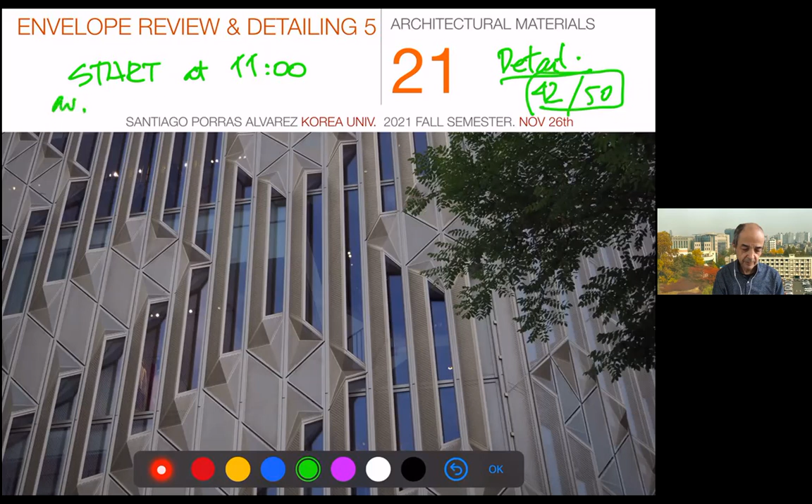So probably both the practice and the difficulty helped. It was good because in the exam, the average was about 77 out of 100, which is the aim. So I guess the exam was rather easy, which I'm glad. And actually only 5 people this time are under 50, right?

Of those, one, he knows who he is, but he has just 18 points. It's the one who left the exam in 5 minutes. But doesn't matter. So I would consider just 4 people, and they're not excessively low.

So let's see. In the cover, you have the facade. I think it's the Burberry shop in Cheongdam, Seoul, which is quite interesting, a double layered curtain wall, which we'll not see. If I find the detail, it could be practiced sometime later.

I will start with assignments because we have one exam left, one quiz. The quiz adds, of course, but the quizzes are our kind of practice, and they don't have so much influence. So right now, what you can do to improve apart from attendance is assignments. And still I'm missing a lot of assignments. I will try to catch up over the weekend, so I will have clear who is missing. So I will put a warning, but really: assignments, final exam.

So the second part. There's not much we can do beyond what we did already. Then we'll see the detail of the exam, as I commented, and I will have whatever I think is interesting, some more notes on envelopes, so we can start on Tuesday with the exciting construction management lectures, which is just 2 lectures and 1 quiz and 1 assignment.

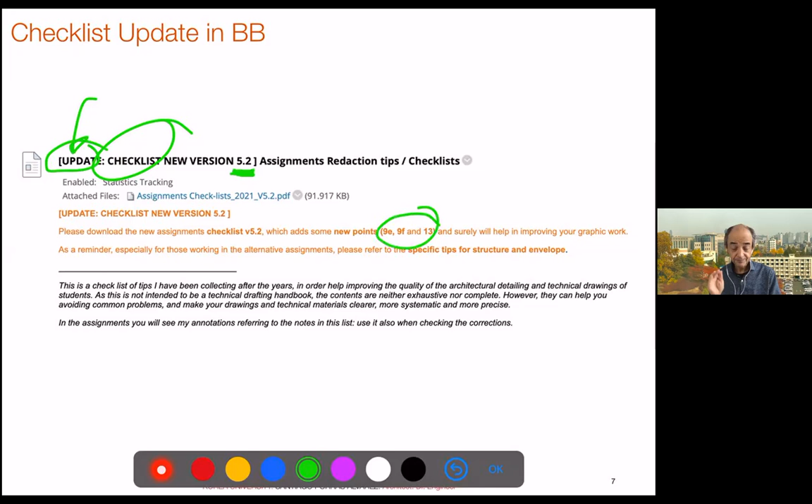So in Blackboard, remember we have a checklist. I updated it with 3 notes, so now the version is 5.2. Please download it and have it as a reference. I added some points because I started to put the notes on many of your assignments. Please go there and use it. The new notes are in point 9, which is one of the points I comment on more, in terms of marking and describing all elements in the detail.

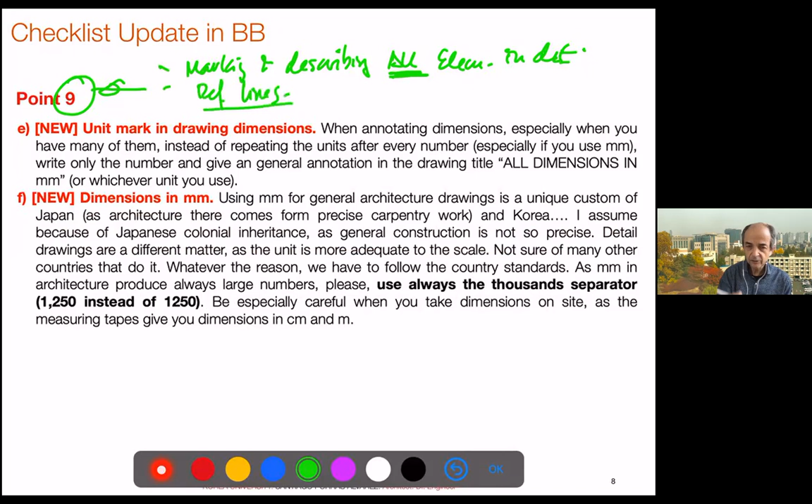It is important because the books focus on one specific part, but when you make a real detail, you have to tell what every little piece you draw is. For the people who are going to build it, of course, but also for you to demonstrate you really understand what you're drawing. It is also about the reference lines, how to put them. The biggest problem is often they get confused with the drawing, right?

So if we have the typical detail of a facade with a window, the layers, and we put reference lines which are just in coincidence with the lines of the drawing, it's very hard to know what they are saying, right? We don't know if this is the floor or just a reference and so on. And that happens very often.

So one thing I added is the unit mark in drawing dimensions. I noticed many of you had many small dimensions, like 200 millimeters and 1,200 millimeters, and millimeters appears all the time. That makes for very long writing, right, with plenty of units. So what we do is to put just a note: all dimensions in millimeters. So usually in one drawing, we use only 1 unit.

The full project should be in 1 unit, of course, but in some places it's more appropriate to use meters than millimeters. So in that case, you just put the mark and you don't need to repeat millimeters all the time. So you avoid confusion and it is much easier to read, to understand. The other thing is the dimensions in millimeters.

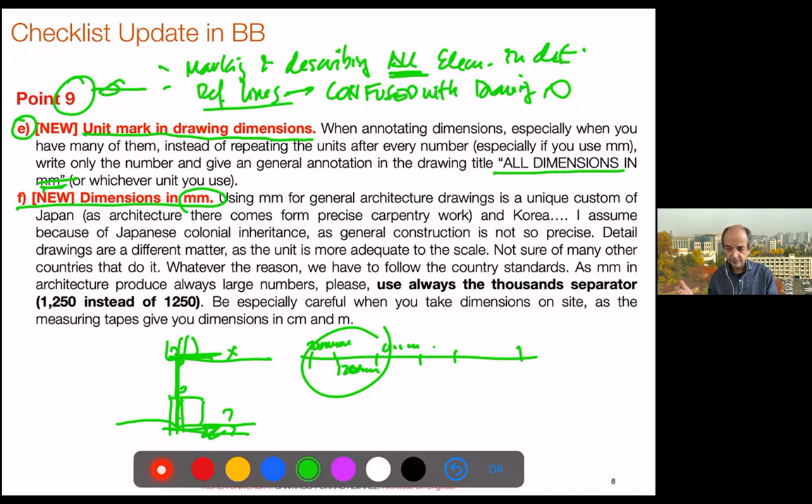This is a fight we have, especially from the States and Europe, with especially Korea and Japan. I don't know why architecture is dimensioned in millimeters, because the units we use are in relation to the size of the elements we dimension. And architecture obviously is best in meters or at most in centimeters. Millimeters we use only for details. So I don't know why that custom in Korea. My guess is that it's a Japanese colonial inheritance.

In Japan, architecture is almost synonymous with carpentry, and carpentry is precision work. Japanese are very precise. In Korea, without saying better or worse, the precision is not millimeters at all.

In Spain, I was told that putting 1 centimeter less or more in dimensions was silly in architecture, because really there's no way we can control that. We already commented, for example, in the structures, we mentioned the concrete slabs, which are just leveled by hand, and those slab borders where the concrete pushes the form, then retracts with the curing and so on. There are many errors, but whatever.

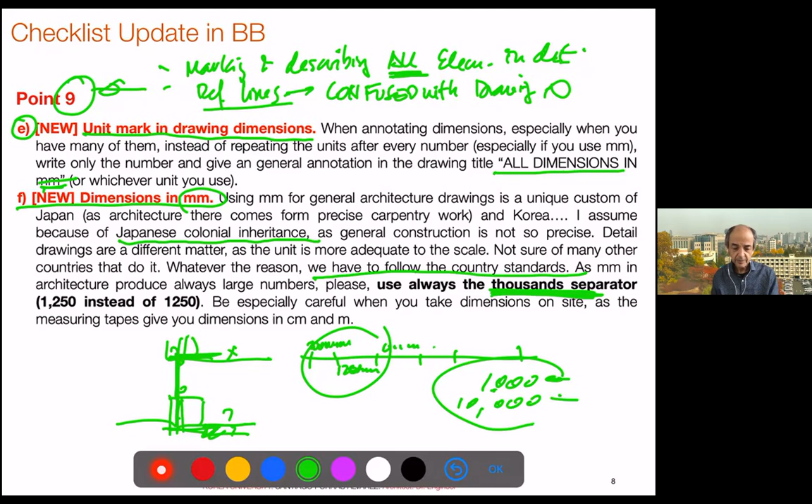It is easier to read, but I would be consistent and put the thousands marks everywhere, so it is easier to read. This is a very small note. One more note, which is new: this is not very important, but it's about color in construction drawings.

So it is perfectly okay to use colors in your details, that helps, especially in assignments, competitions, and publications, where we have more freedom. So clarity is important. But in real life projects, on construction sites, still in 2021, almost all work is done with large size sheets, where color printing is not as easy to control and as easy to make as line drawing.

And of course, on a construction site, they have thousands of copies, so the price and cost also have some influence. But really, on the construction site, the plan should be clear, and clarity is achieved by reducing the lines. So we use only lines. Sometimes some filling, but workers, collaborators, and managers are used to seeing line drawings.

Most especially on the construction site, we have wind, we have rain, we have sunshine. It is very hard to build with a tablet. We have freezing temperatures, sunshine, wind, things fall down, break, and one paper sheet is very easy to preserve.

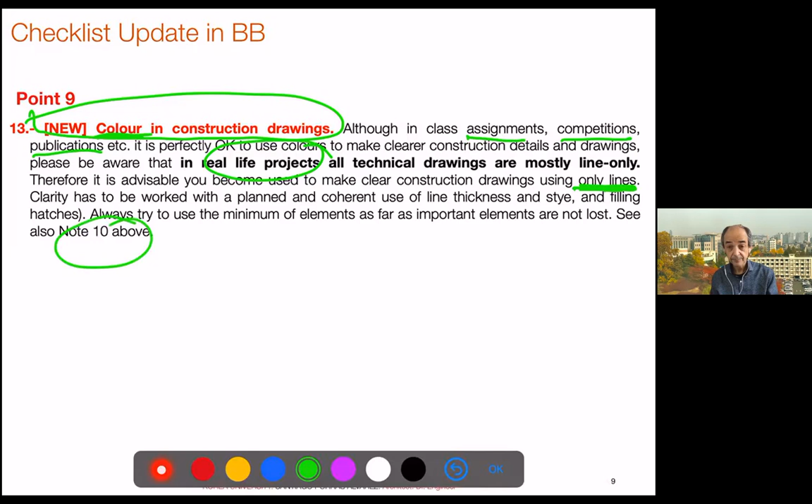So it is a good exercise, you get used to the discipline to draw with lines. And I say this because for some reason, the SPC for verbal and graphic expression is included also in our course. This is why we insist so much on assignments and drawing quality. So please be careful, and see also note 10, which is also in the checklists.

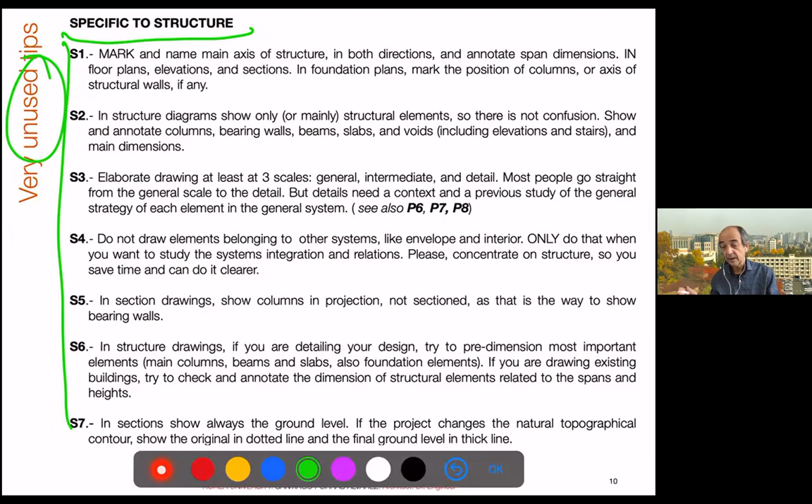There are very unused tips. Of course, not everybody is doing structure, but for those doing the alternative assignment, I wonder if they follow these, just 7 tips, which really help make the drawings clearer. And for everybody, the envelope, which is what we've been doing since assignment 7 — again, there are very few tips, but things that help really make the drawings clearer.

I brought some examples. This is something you remember, this is the plinth detail. I took many examples from assignment 7, I think. This is an envelope detail. Rather than just putting a set of pieces, we have to make very clear what the envelope is.

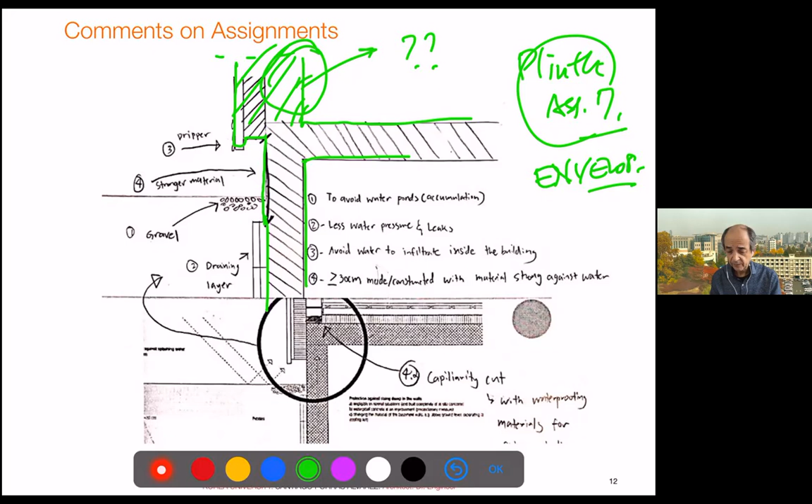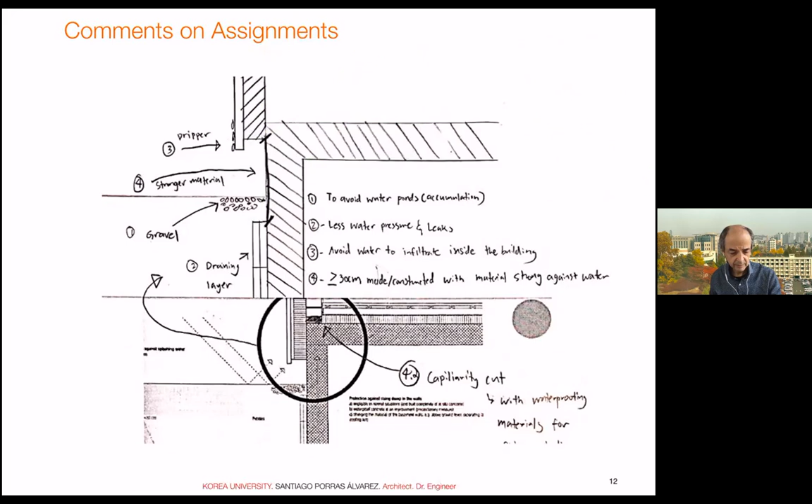Let me clean this. So it will seem that the envelope is just parallel to the structure, and it will be fixed in some strange way, which is possible, but this is confusing. And then the hatches also confuse — this part in the book is an isolation, so using the same hatch for an element you understand as structural is confusing.

And of course, there's no excuse to just put a copy of the drawing. The assignment was not about copying and showing the detail. We all know we have the book, we have the handout. It's for you to exercise in this kind of showing and understanding things.

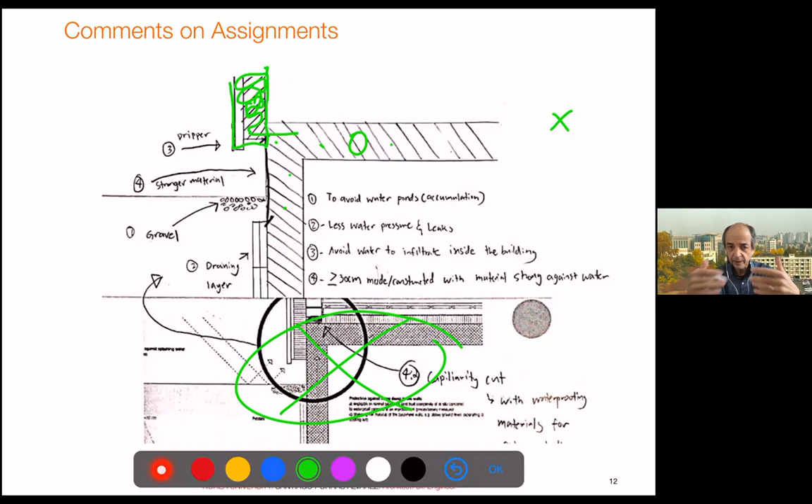There were some people who actually did well. At all the points, of course, I wish the writing were a bit clearer and the drawing nicer, but still we can see all the things. What I don't understand, and this is the extreme case, is why fragment it all.

And I show this and comment because that fragmentary vision of things, only seeing the details and not the big picture, is a problem I see in your generation. I think it's a cultural or generational problem, I don't know. But we are used to small bits of information, when we need the big picture, to know the generality and then go to the details.

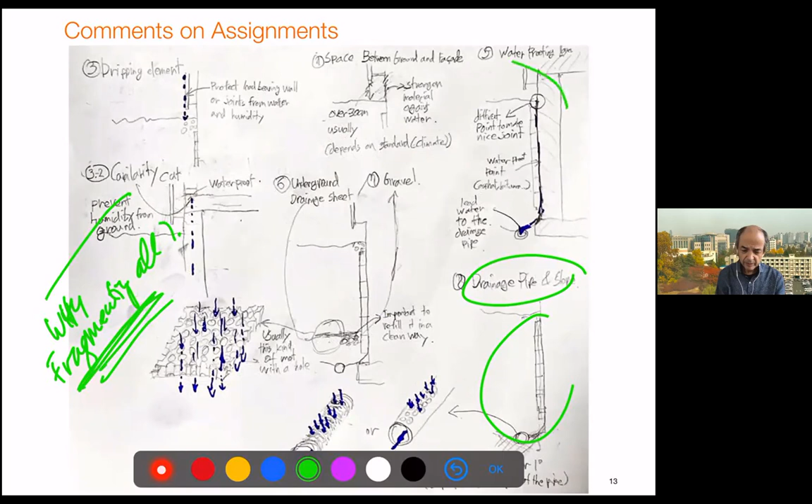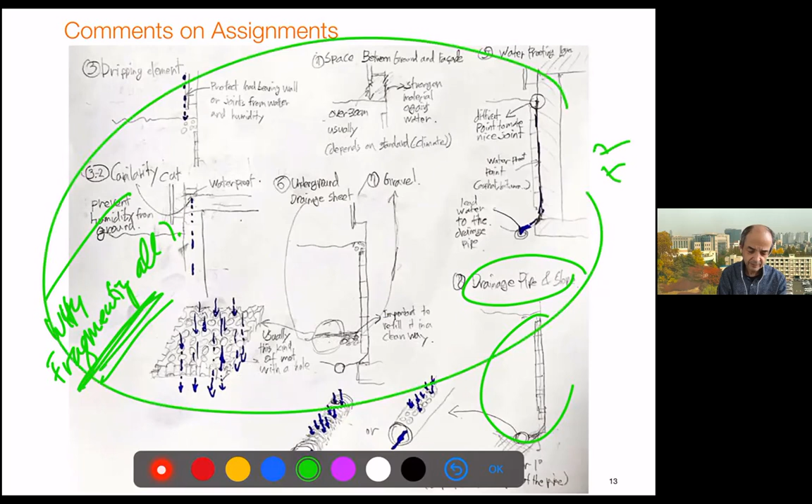What is the difficulty to put all that data together into a large, well-constructed detail? This is very common. Again, this is the most extreme case, but yeah, the big picture, and in this case it's almost literal, right? The integration into one detail is something I miss in this case. And this was quite correct. Almost all the comments include every little difficult point we commented on in class.

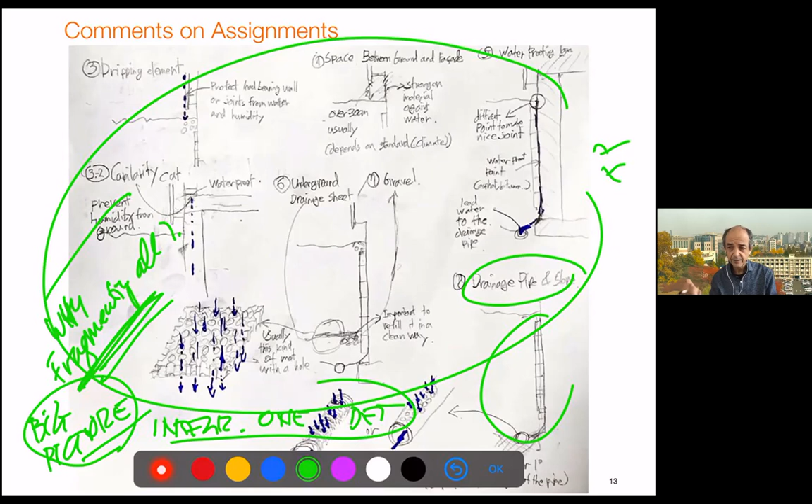But well, I would insist, not only for detailing, when you study, you can see that from the lectures, when you read books, not just small bits of information you get from Google and so on, you have to really create the big picture of everything in your mind. That creates knowledge beyond just bits of spare information.

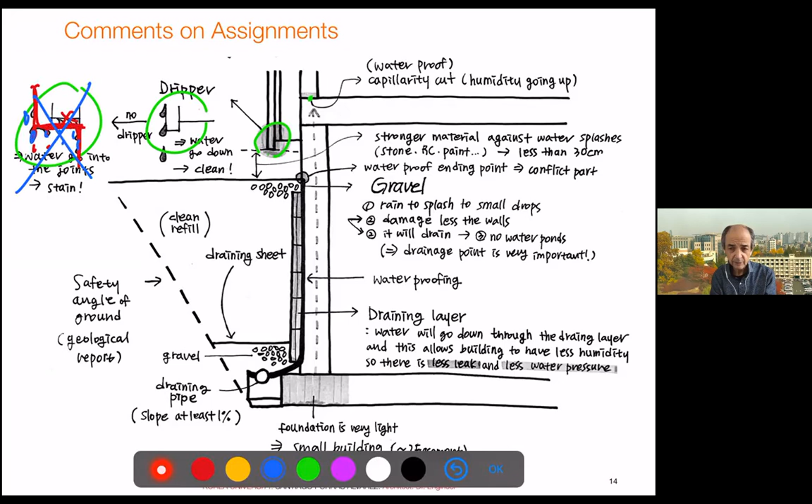Some people did a really careful drafting and a lot of detail, and that's perfectly okay also. But here we have every element clearly pointed out and clearly annotated, right? There's no doubt, and there's clarity.

However, the same students have, again, the same problem. Why was such detail not finished? And this happens very often.

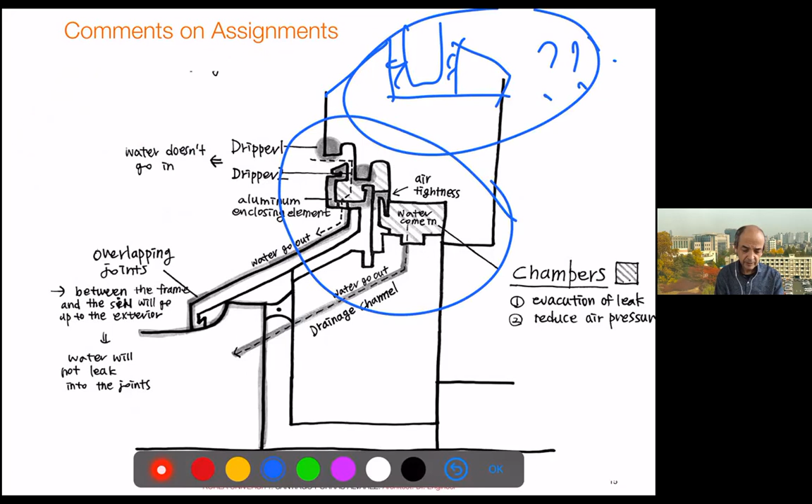Of course, this is a difficult part, but already we are cutting a lot of the detail. So this is very nice, very clear. And even here we say, well, we don't know where this goes out, probably goes under the sill, right? This is something we commented on in class.

This is something we don't always see when we have so many precautions. But yet it is very clear. Now we can see almost everything we need without a lot of complication. And all notes are short and they explain the thing. The only missing part was this, and I don't understand why. Yeah, this is again that mindset of getting too much focus on the small details, on the fragments, and losing a bit of the context.

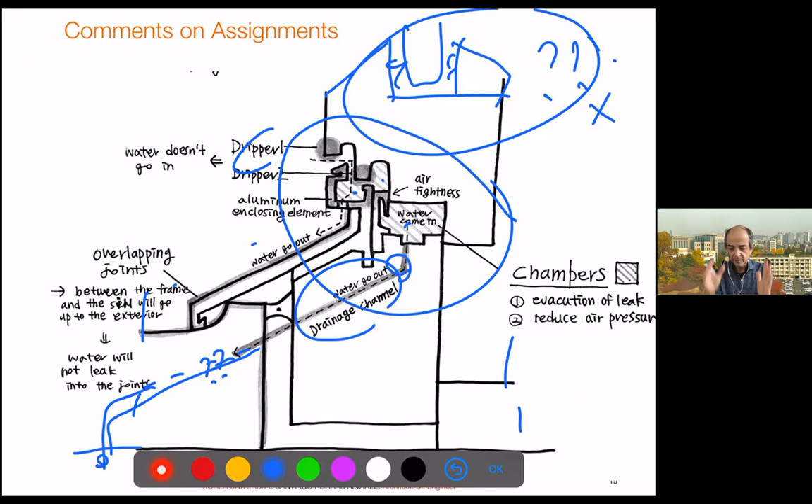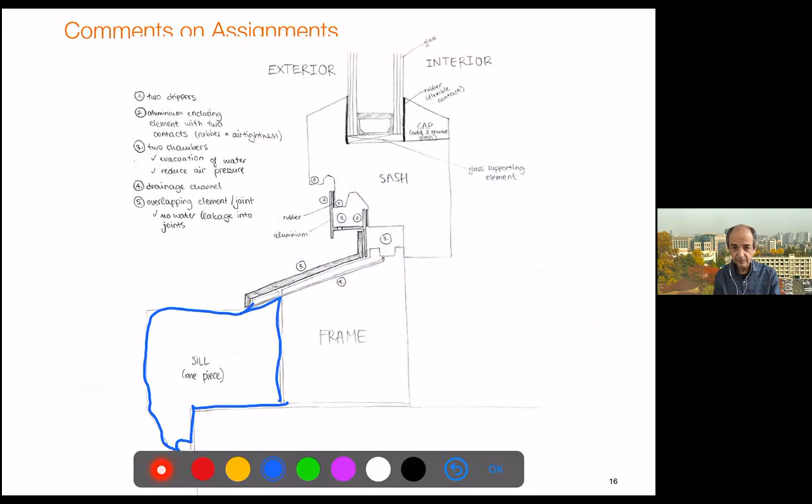This is a well-done example. Actually, one of the few who tried to complete the sill, right? Of course, this should have had a small dripper. Actually, not a very nice sill, but okay, this has the full detail with enough simplification.

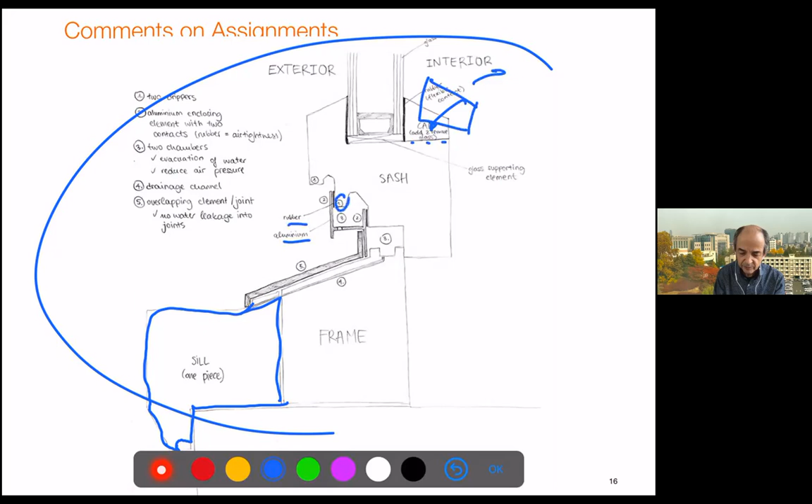Very few people, for example, identified the cap, which is one element we can just move out to replace the glass, make it easy. And again, this is clear, maybe writing a little bit too tiny. And again, I would try to avoid, this is again note 9, avoid annotating inside the detail.

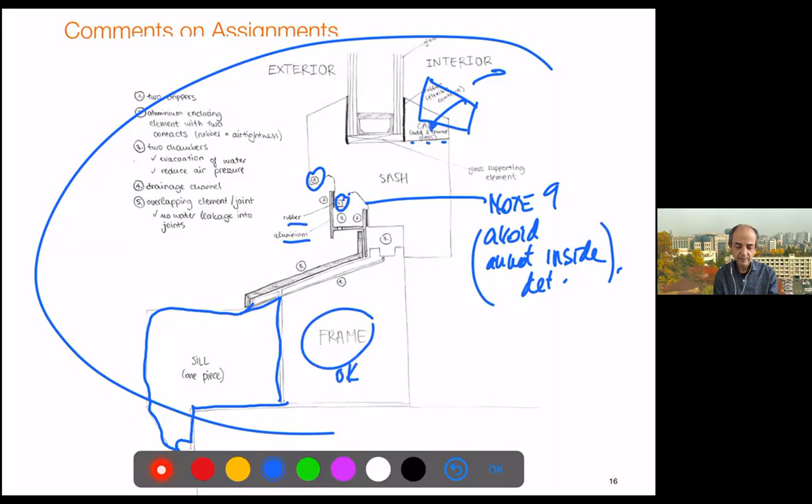In general, especially in small parts, here it's okay, right? Because we have plenty of space. But in general, we try to avoid that. Very few people noted the frame. And one thing, this is a different opinion from the book.

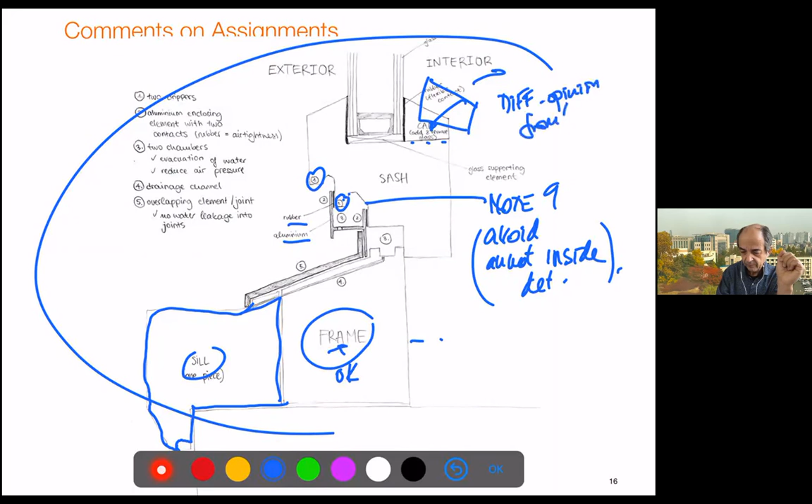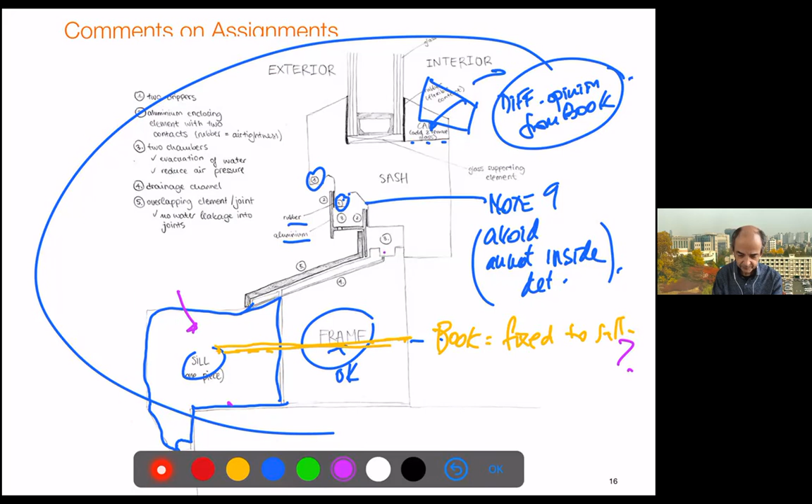If you see the book detail, in the book they put the frame fixture with a big screw to the sill. This is the book, right? It is fixed to the sill. But I wonder why they do it. This is a kind of additional element, it's not very strong. In general, all frames are fixed to the fabric. So the element would be better fixed to a spandrel, right?

This is something that even in a good book, and the Deplazes book is a very good book, written by people who really build. They have the experience of building and know what I'm speaking about. In terms of architecture, you always have to be careful with those who are pure academic and never built anything, because the orientation and vision of things is totally different. But in the case of the Deplazes book, you can be sure those guys are good architects and know what they say. I just don't know why they do this.

Still, we keep always improving things and changing, and I think this is one thing I would never do. So always try to be critical, even with the good books. Not to mention what we see in blogs on the internet - there's so much trash and confusion, and even more in published papers. Be very careful with papers. I think books in general are more reliable because construction is not an academic problem, it's a technical problem. But that's a different thing.

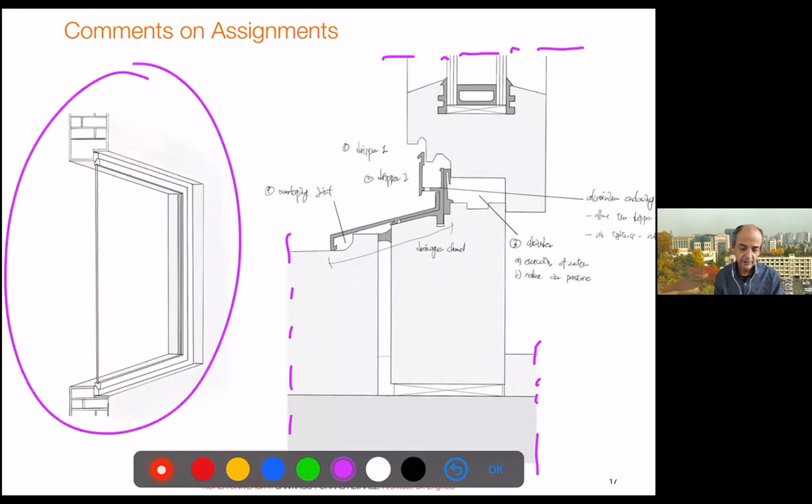This is again one detail which is very nicely done. I would miss - I know the book doesn't have it - but you have to make clear you are not showing the totality. In this case, it's clear. This was probably drafted on the iPad or with some drawing program, but many of you put the reference, which is okay, though I think it's kind of a waste of time.

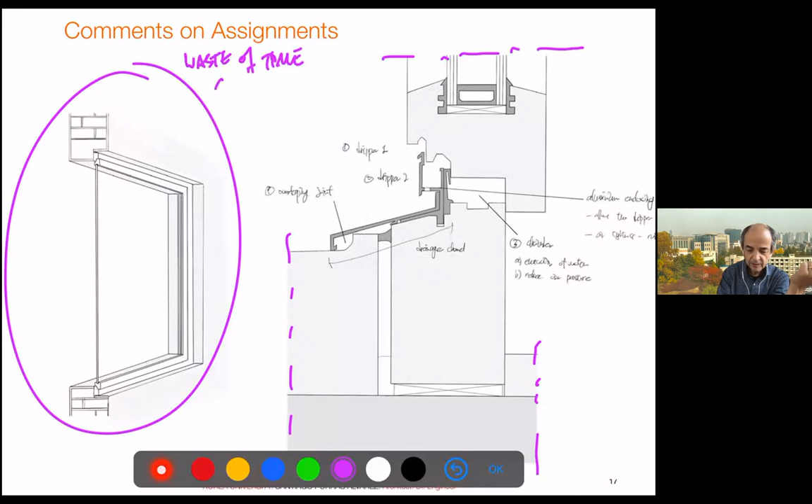Just to repeat it, but it is good practice. So you do it if you want, but it's not necessary. What's interesting is that many of you put a mark like this and showed the detail, and that's not true - what you're showing is really a small part, not even the full interior part. And those elements are cut, they do not go to the end. Be very careful with this, because except for the detail we saw before, very few people were clear about that point.

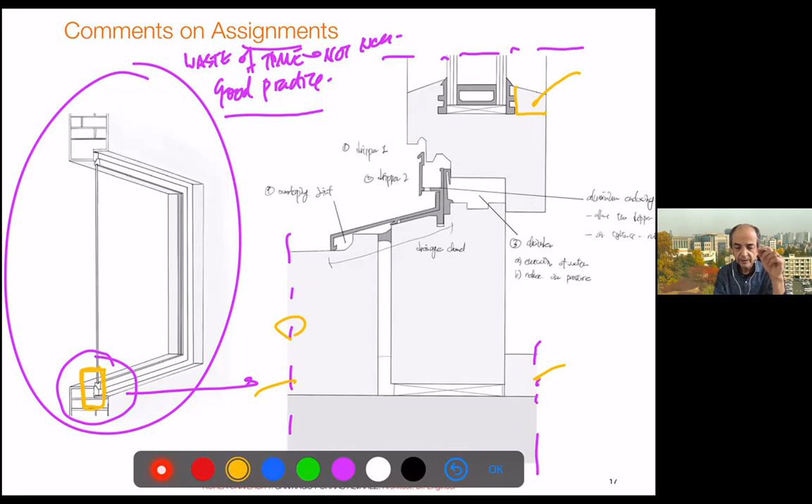You see that the cap is mixed - sorry, missing here. One thing many of you do, and I think the book details it like that, but in reality very seldom will you have the sash in perspective with this cut - you won't so often have this kind of shape that lets you put the cap into those kinds of slits. In reality, the element will be straight, because the standard elements have many points, but they will be fixed just by pressure - like 3 points of contact which get pressed, and that helps keep it perfectly fixed. So I'll put a question mark here, but I never saw this in timber.

You might see it in industrialized products, maybe PVC or some aluminum systems - they have a proprietary slit for their own band. And of course, it's very hard to do in the cap. But again, I put a question mark here for you to understand this point. And of course, as we said, you have to mark everything so you're really clear and demonstrate you know what you're doing. Very few people spoke about those elements.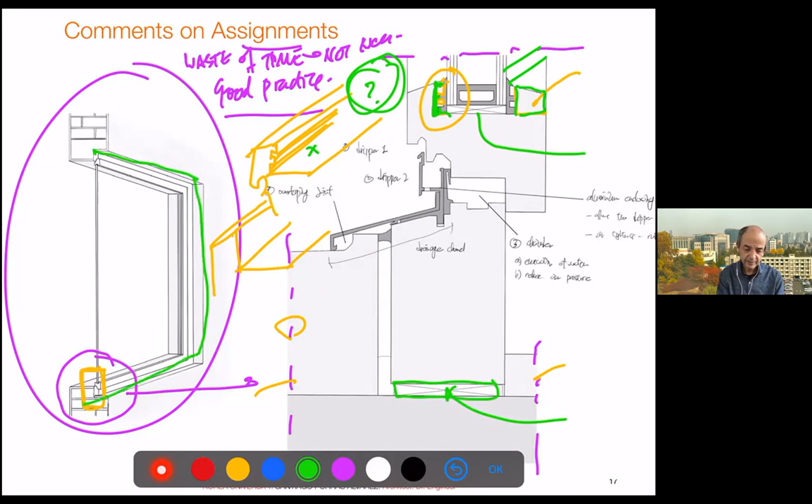We have the opening of the fabric, which is not exact - we need some margin to put the frame inside. If it's too tight, it's almost impossible humanly to put it in. Then we need elements to adjust that small gap between the fabric opening - or the wall opening - and the frame. There's always a small gap between the frame and the fabric, and this is a necessity, because otherwise it's impossible.

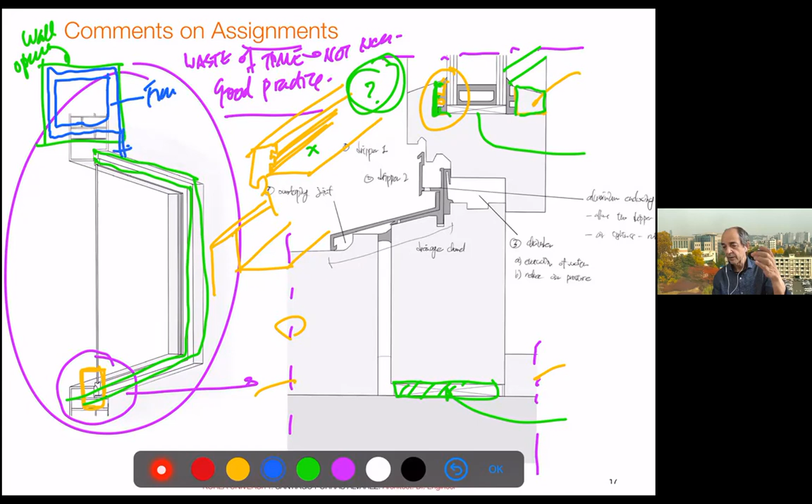This is the same thing that happens with the drainage pipe in the roofs - we need some space to put things inside. This is something that comes from experience. So this is the adjustment element - we know it's fixed, and that allows us to find the exact point, in that case by the millimeter, if the constructor has good ability to do it.

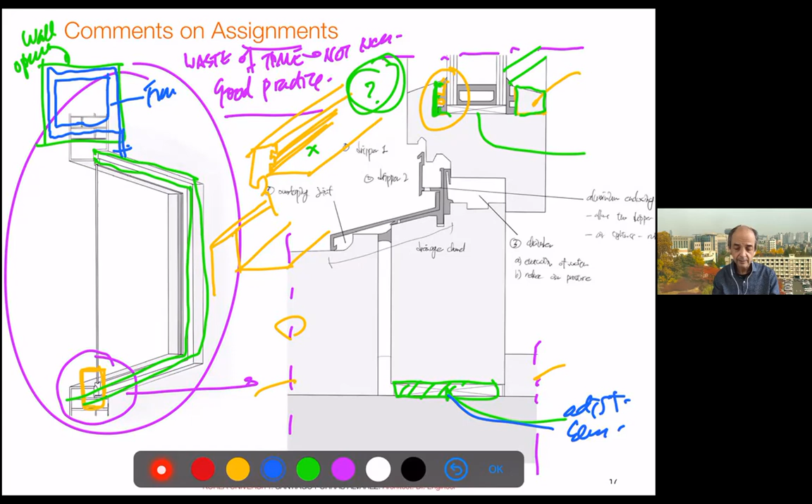Let's go now to the following - this is assignment 8, I think. Again, this is the extreme case of the bad assignment. You have to show the whole envelope at least, and then be very clear what the layering is on top of it, and make the lines in a way that we really understand - what's the pipe and what's the insulation gap, since the pipe and insulation gap are pointing at the same point.

And this dimension is in the wrong place. You have to extend the waterproofing over the finishing point and so on. So this is one detail which will be confusing more than helping. So it's assignment 8, not 8 points out of 10.

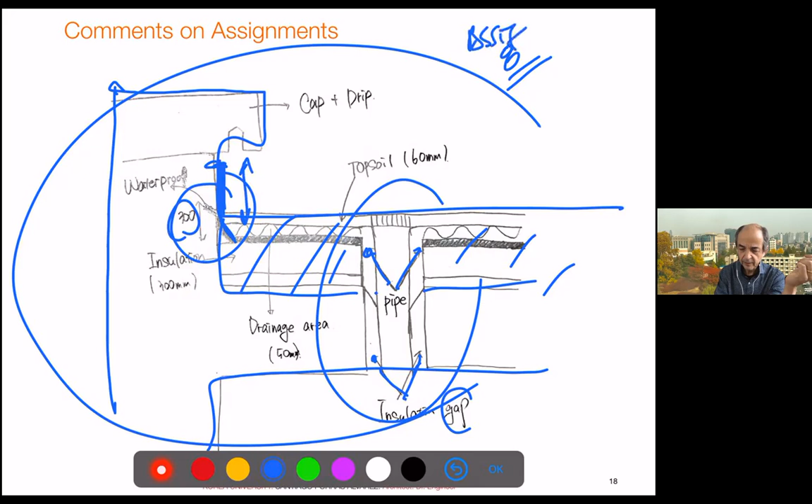This is more or less a bit more carefully done, but who on earth can understand this? This is a mess of arrows everywhere and bubbles. And if we go to the bubbles, who can see what happens inside those points, right?

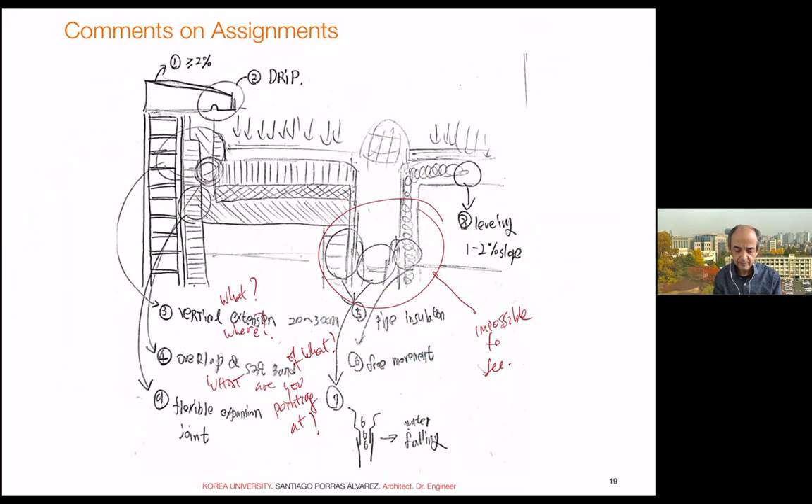So this is the anti-detail. Also, the annotations are right, but the writing and the drawing is so careless. Understand me, this is not about the need to make a perfect, beautiful, excellent drawing. It's just to be clear. And this can be totally confusing.

We cannot see even so it's a vertical extension of what and where, right? And what are you pointing at? You have to follow the line. You have an element which points as brick, air gap, insulation, something that looks like concrete, and something that looks like insulation again. So this is purely confusion.

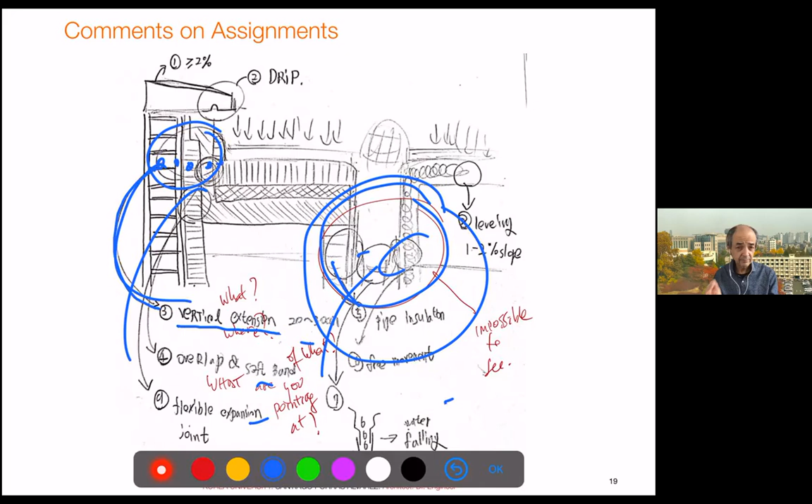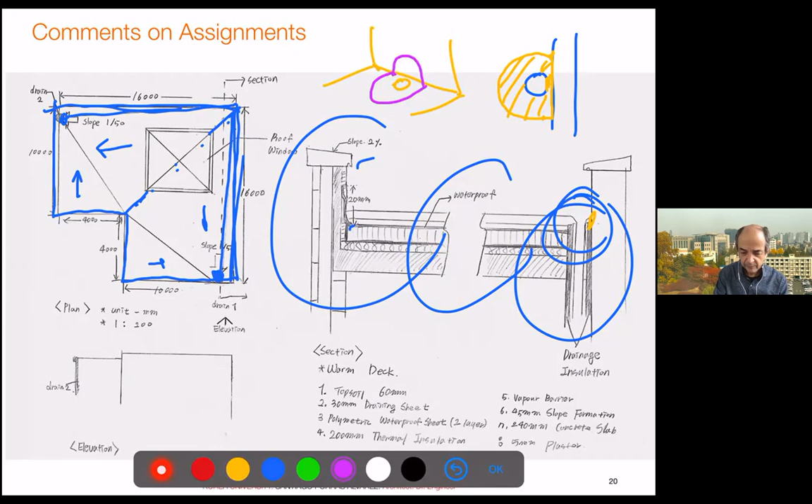But we try to avoid having things like that touching the wall. You will see it often. But if we see the plan, if we have the opening, it is very hard to work that kind of first border of the waterproof on this side, right? We will have to put, if we have the perspective, another bend where we have already another bending and overlap of the waterproofing layer, right? So it will be like many things being together.

You will have the difficulty of this connection again. But this kind of solution is something we, in general, avoid. You should try to have at least 30 centimeters or so to the wall, so you have a space really to work that element, right? And of course, you will try to have that ending point counter-sloped, so the water will not accumulate against the wall.

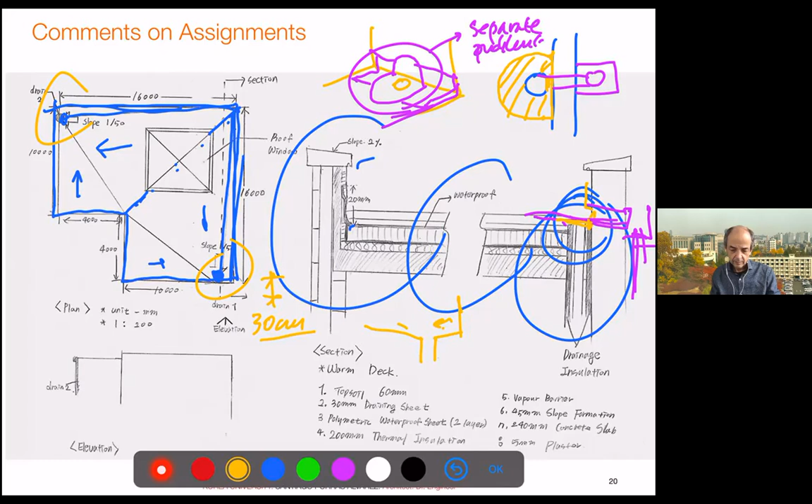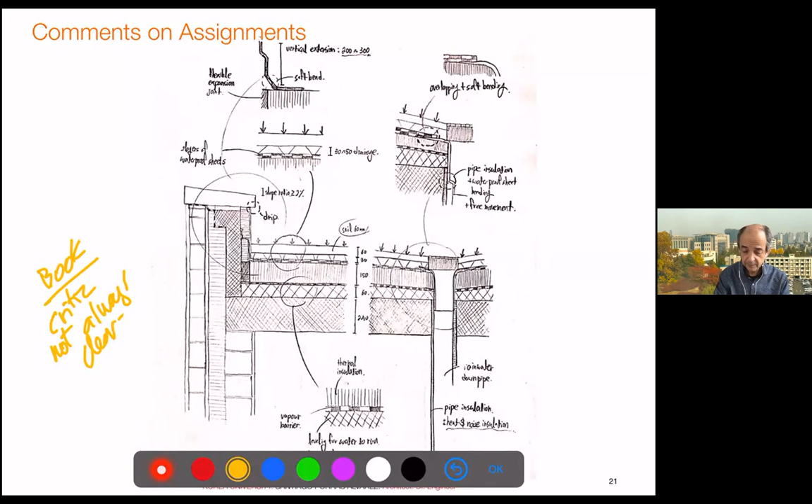Let's go to one more. So this is a nice detail, actually taking the book, and again, the book, I had some criticism, right? Because it's not always clear. This is what I said: you have the waterproofing, which is drawn straight, and then you put the detail and you put it bent. So this is correct. But what is the difficulty to show it clearly also in the detail? And this happened in more than half the class.

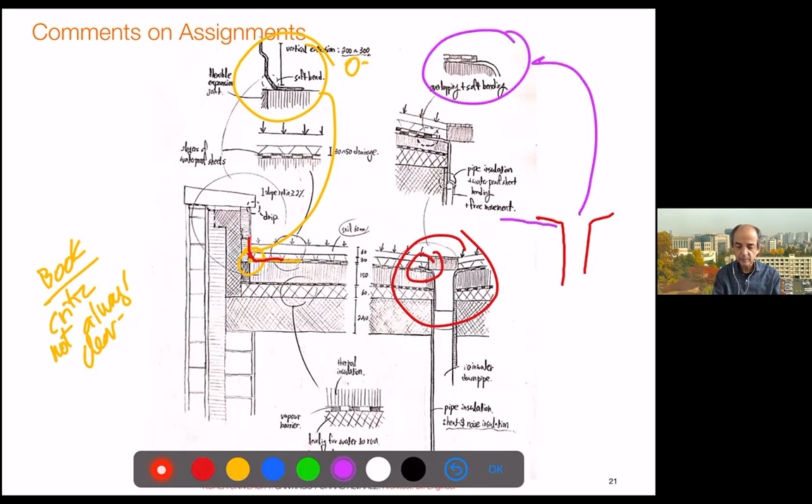Same in this point. So here we see that this is confusing. It seems that the element getting the water is over the waterproof as it is drawn. Then you draw it correctly on the top. But what is the difficulty again to integrate it?

You can always make the large detail. So a large detail is okay. Maybe this is 1 to 20 and this is 1 to 5. That's perfectly okay. But the 1 to 20 should be consistent, right?

You have to make all your best as much as possible to avoid any kind of confusion. Even the drip, just putting the word is not enough. You have to really draw the drip. And if this is too small, you put it bigger, but you have to draw it. And this is one of the notes I put more often.

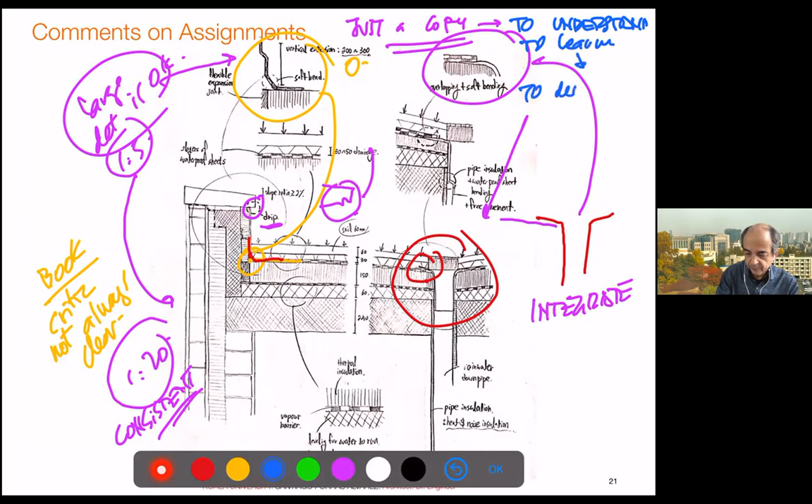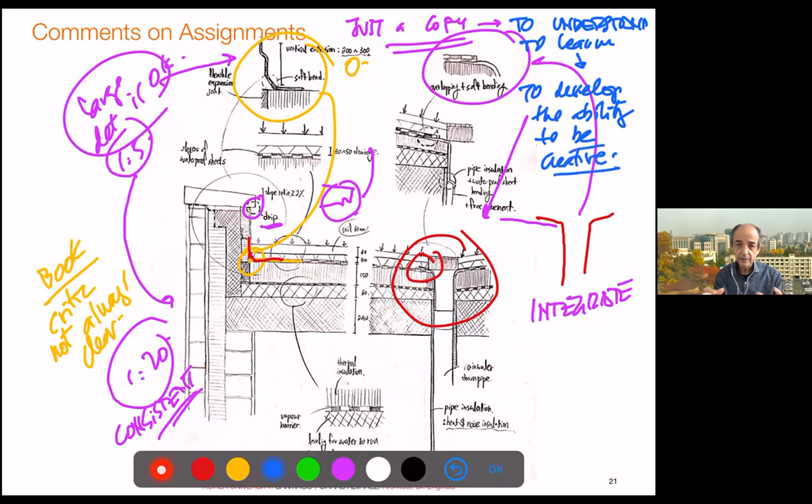But we're going from really poor and confusing assignments to better done ones. And remember, this is just a copy of a detail. This is just a copy, but the copy is with the purpose to understand, to learn, and then to develop the ability to be creative. When we understand how things work, we can make our own details. This is not about being a kind of human scanner, right?

Which I see sometimes the attitude of... losing battery, but don't worry, we will finish. Oh, already 11:30.

People just trying to replicate the drawing, but not really getting the logic and summarizing the points which are important. So be careful with this, because I see this kind of attitude very often.

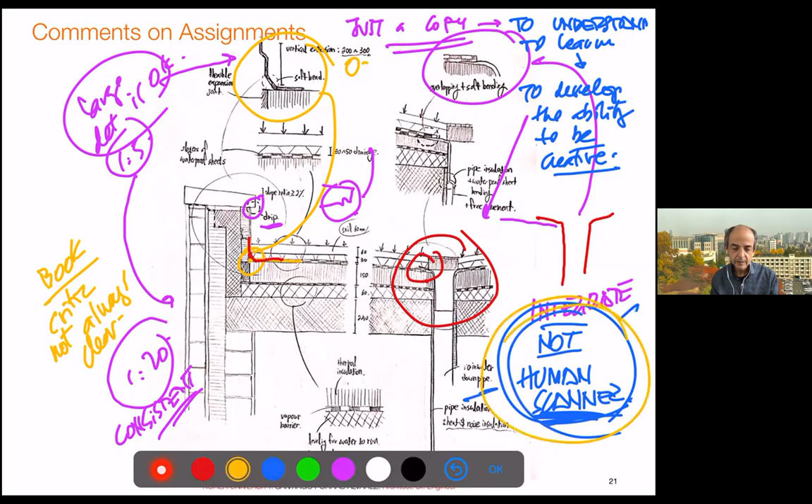And those assignments, well, this is one of the good ones. So this is clear, simple. Still uses color, but color helps, right? We commented already about color. I would try to make the writing more simple, but okay, at least it is clear, right? I can read. Probably too small at points. You can always improve, right?

But everything that we commented is clearly in this detail. This detail is big enough. Those images are clear. The only thing which was not easy to see was the pipe. So that blue was my drawing, right? So you have to make sure you understand the pipes. And I think many people were confused about this.

You have one element which is usually made in one piece, which is kind of a conic element. Well, maybe this is a bit too big, right? So it's kind of a conic element with a pipe already in one piece, right? This is what you put on the concrete, right? And where you later put the insulation and you put the waterproofing on the top, so you're sure it overlaps without reducing this hole. So some overlap is okay.

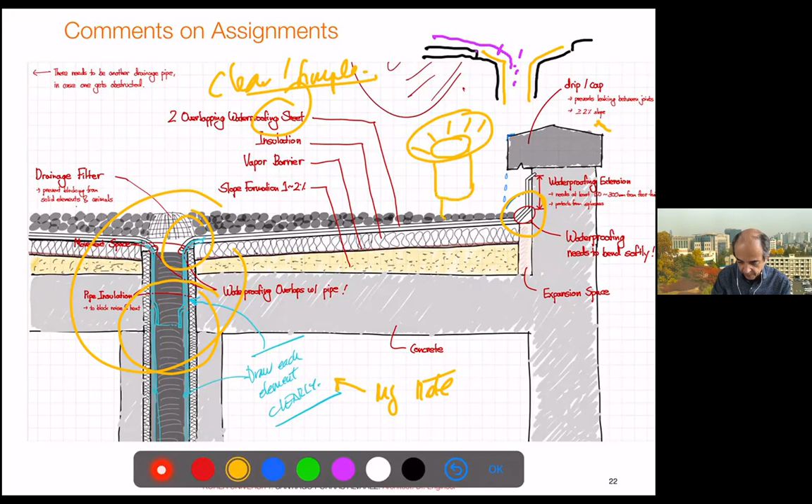And then this element has a small narrowing, so the following pipe can be put in, right? This is what this section says. And then that pipe goes down. So you just have two pieces, one piece inside the other. I think I explained it in the lecture, but you have to understand it and try to draw it clearly.

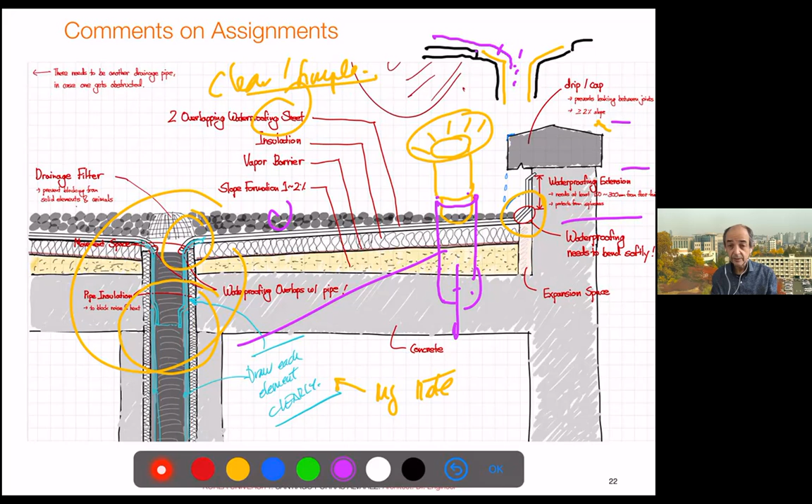So this was clear, and well, I see the gravel. This is kind of a mix of hand and computer work, but what I said, you don't need to complicate and add a lot of things. So minimum annotations, you don't need to have the whole explanation, just the keywords, and that's enough to have the detail under control. Then when you make your own detail, you know what to be careful with.

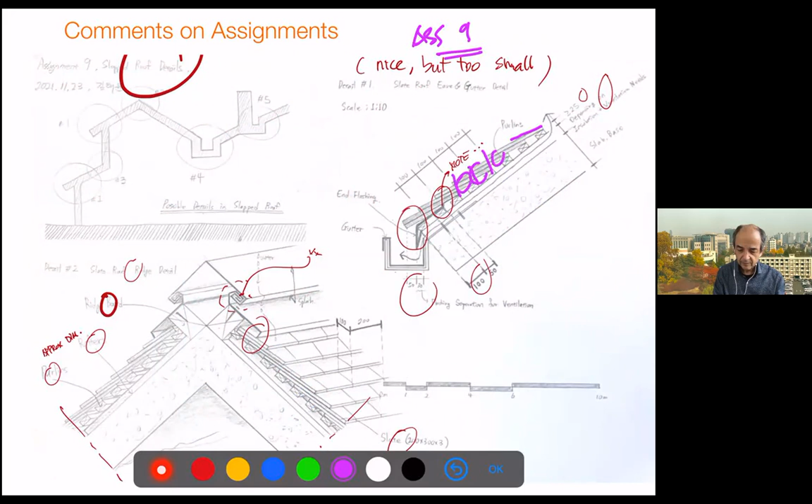And then only one note, this is from assignment nine already. So probably of the early assignments, the only one which was near perfect. Well, I'm missing something in the cut here. But in this case, I see that in every cut, we have the 3 layers of tiles. This is a very difficult detail, very tricky. And almost nothing is missing. Everything is clear. Well, I only annotated again. The texts are very small.

Think that those drawings are not for your professor, are not for yourselves. You have to get in mind that those drawings should be read by anybody else. And you should not think that anybody else has good eyes, or they will have the patience to have the reading glasses all the time, or they will see it very slowly. People work very fast, right?

So those dimensions which are very tiny, those texts which are very small, chances are that people will not read them. And sometimes this more or equal 25 millimeters, right? In some cases, it's so small that I read 225 millimeters and I put an annotation. This is not 225, but the writing is so small that people will read 225. Anyhow, I think this is the best I saw yet.

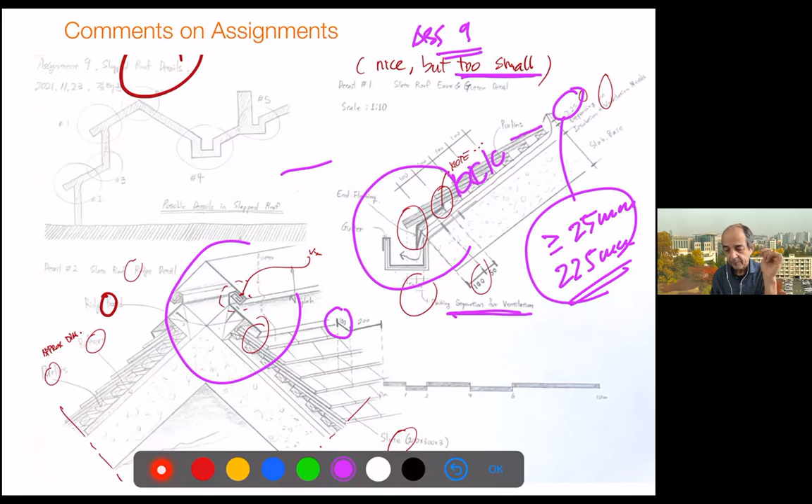Only one thing which I see very often is this kind of seaming. If you put this kind of a thick thing in the drawing and you say nothing, or even if you write it, it will become silicone in the construction site. You will find these two sheets there with a nice, beautiful silicone element there. So when you draw, be very clear, try to avoid being confusing.

And again, I know that the detail I showed in the class didn't show it, but okay, you have to improve things. If you speak of ventilation and the insulation, it's better you draw the insulation.

Otherwise, people do not know what is what, right? And you control the size more. This is less important, but again, you have to try to be really clear and careful. And in this case, all the small details were very carefully done. So good for this presentation. And again, this is all drafted carefully with rulers. The style is not the problem. The problem is the clarity of the drawing.

So I hope this helps you understand a bit more all those very short and very fast annotations I put by hand. Maybe it's a bit more confusing. I don't know.

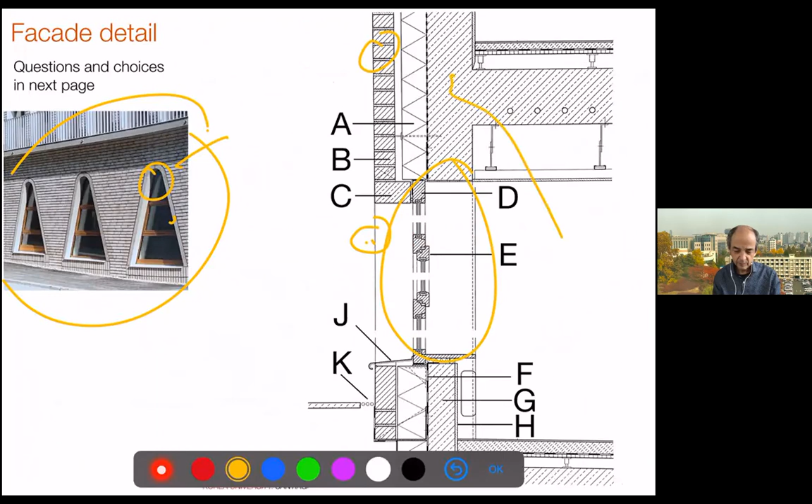So from the exam, the detail, and I think it was easy. So we have one facade, and the photo shows it's a brick facade with a very interesting window with kind of concrete jambs and a lintel, something that looks like a wooden window, something that looks like a concrete wall. So we can see the window sill and the plinth. I made an effort to find a detail which is clear. There's no confusion at all.

So probably it's very easy to see that B is 1, right, the veneer. The precast concrete reveal and lintel is clearly C. The plinth border with gravel and drainage is clearly 3. The oxidized asphalt sheet, I could have said vapor barrier, right? But I didn't see it. But obviously we have only one place, and we have to look for that thing which looks like asphalt, right? So F would be 4, right?

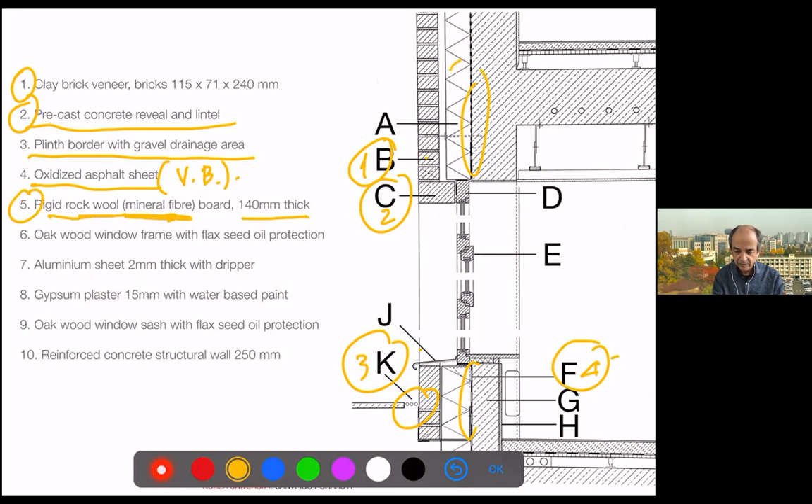That sheet. Rigid rock wool, mineral fiber board, 140 millimeters. So we know this is insulation, and we know this is the insulation standard. So this is 5. Oak wood window frame, and you knew that we would make the difference between frame and sash. Also, I know that in everyday language, we call everything sashes, but we have to make the distinction. We are very technical.

So we know that the frame is D, 6, and it's very ecological. Flaxseed oil protection, not even polyurethane paint. It's a very good protection, but especially in the exterior, you will probably have to renew it every year. Aluminum sheet, 2 millimeters thick with dripper. We didn't say if it is the window sill or a flashing, but the only thing we have annotated which looks like that is the window sill, which clearly has a dripper. So J is number 7.

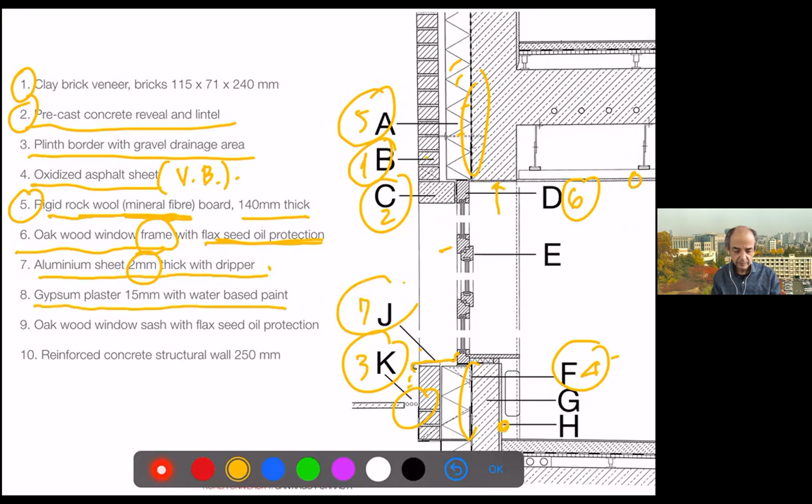Gypsum plaster with water-based paint. This is obviously interior finish. And the only interior finish I see is the suspended ceiling, probably this interior lintel, and this interior thing here, which is H, makes 8. Oak wood window sash, the same element, so the sash will be E.

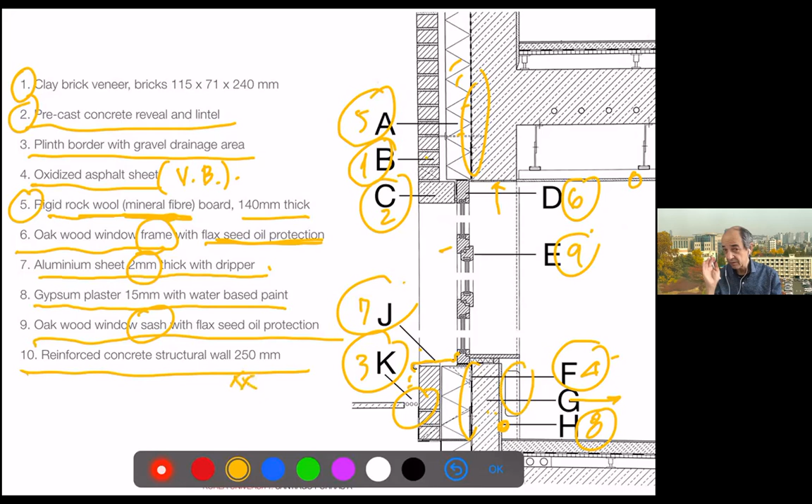We have only G left, which of course is the reinforced concrete structural wall, which in this case is less than 25 because it has a small niche. So in this case, you could blame me. Okay, this is 25, this is not 25. But well, there's only one choice left, and 10. And I'm glad that it was more than 80% of the class. Sometimes easier details have worse results, believe it or not. And I think this is from insisting on the details.

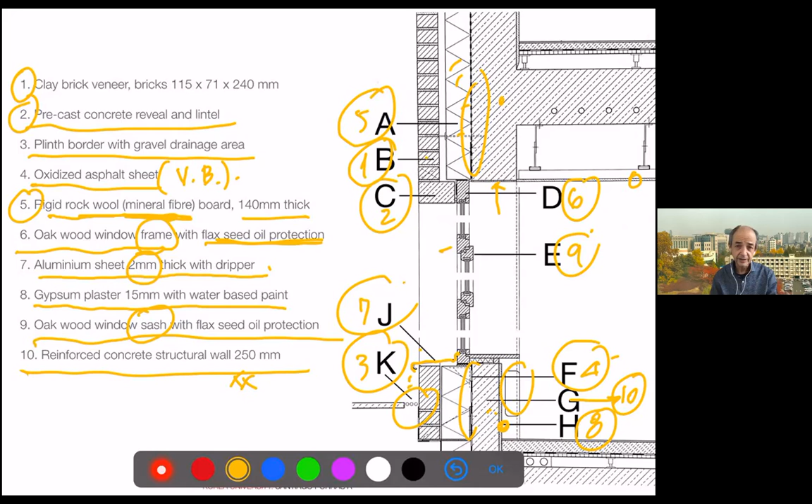So now I think the full class will be comfortable watching those details and seeing how things are done. And furthermore, let me clean this, because I think it's a very easy detail. Probably the final will be a bit more difficult. We always have to balance a little bit.

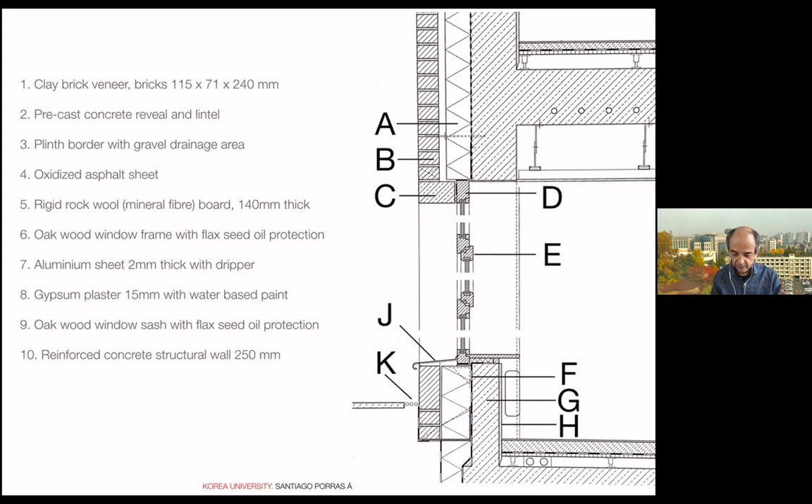A few more things. See the suspended ceiling. See how you have one element fixed to the ceiling and then another element getting the profile. So these are, if we make the perspective, galvanized steel elements, which are hanging points. And this point in the middle allows you to regulate the height. So you can make it shorter or longer. You will have a regulation with the screws, right?

And see how the fixing is asymmetrical, but you will try to have this balanced with the gravity center of the lower part, so it does not rotate around, right? So there's an interesting detail there.

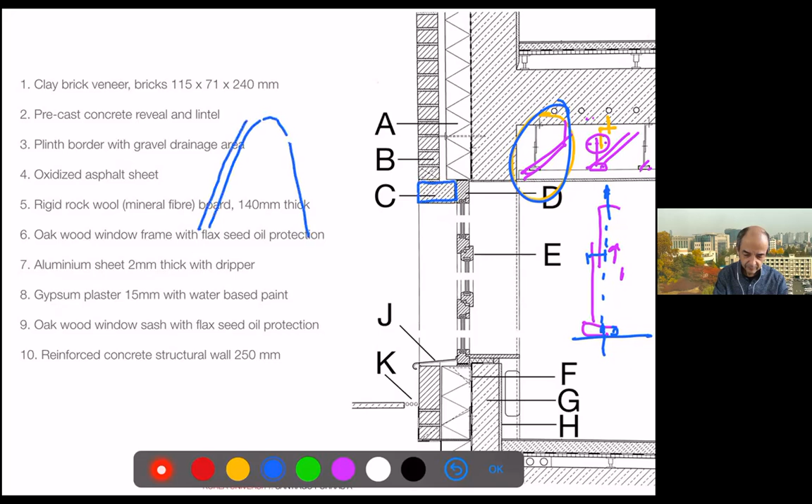The other, see how the brick in this case is supported by the lintel. We saw in the photo that this was a precast concrete element. So bricks can safely be supported by these elements. So this is structural, the bricks are perfectly supported. They have those elements, which was an exam question, I think, or we asked it in the quiz probably.

Those elements make sure the brick veneer will not fall down with wind suction or things like that. And we are just 5 minutes to the final.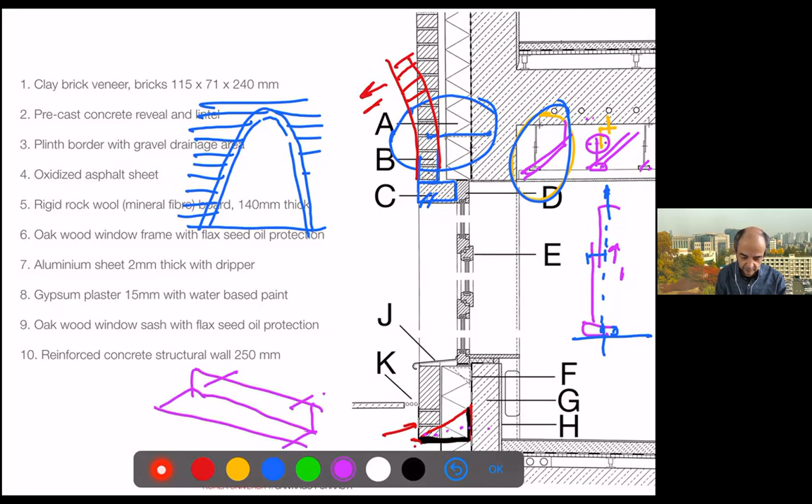And then in this case, even though this is a plinth, you will see it later, the brick is just hanging from a profile. So this is telling this is a strong steel angle with probably some strengthening at the border. So if we see this perspective, we will have the angle fixed to the concrete, with some elements which rigidize that cantilever so the brick will not move, and then the brick will be put over the border. This is what we see here.

So it's quite an interesting detail. It gives a lot of information. And this is, again, a building everyday detail. The other thing I want to annotate before we go home is the way the sash is in the line of the insulation layer. So the sash and the frame, the window, continues this kind of insulation line. There's no breaking. How do you fix this?

Probably you will have some kind of angle in which you can fix the frame, let's have a different color. You will have to find a way of fixing it. Probably you see here this angle. So I was guessing, but this is what I would do. In general, see how they even add some additional insulation to avoid thermal breaches. And probably this is by points.

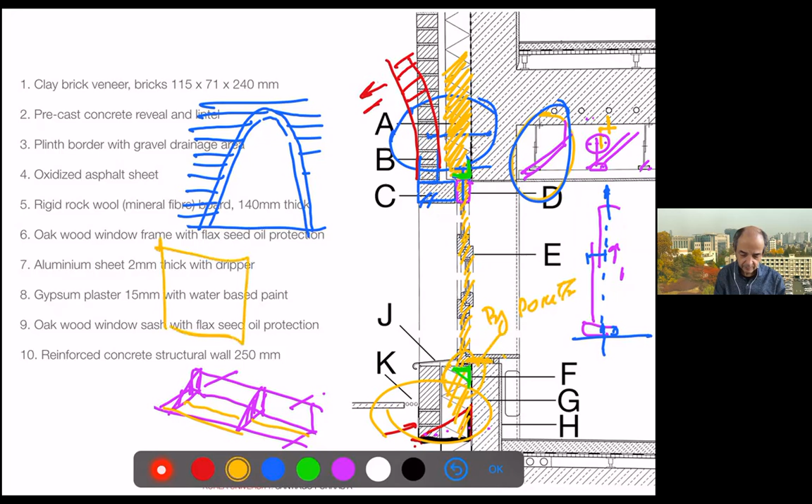So you have the frame, you can fix it in just a few points, depending on how big it is. So you reduce the thermal breaches to the minimum. So there's more in this detail than just the things we asked, but I promised 10 questions, and this is all the 10 things I could make.

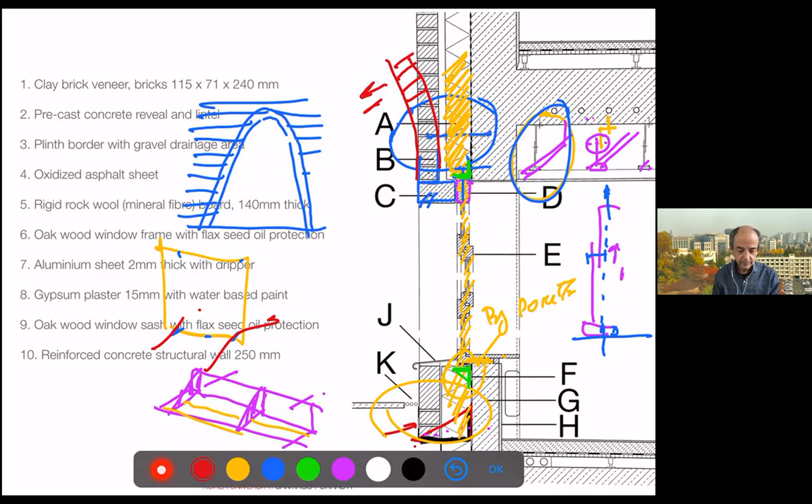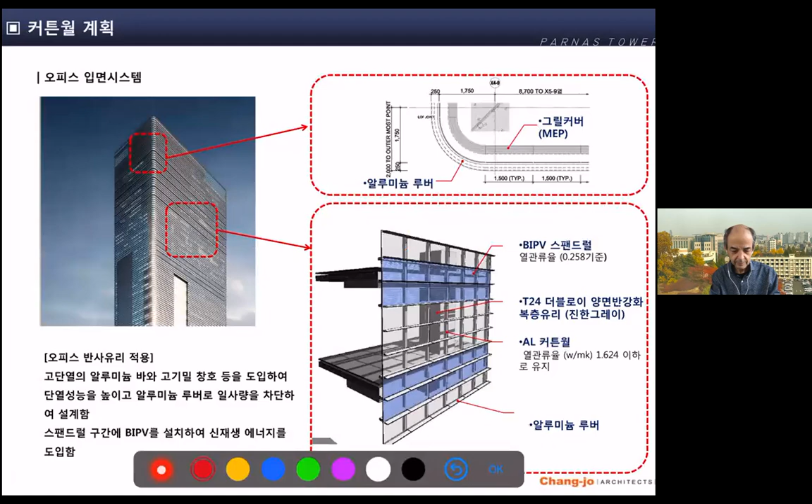Okay, so envelope, we were finishing this, but I think we'll have no time. So I gave you... I think I lost connection, just a moment, I lost the connection and I have to enter again. You know, this happens, and I'm at the school now. And we have just 2 minutes left. Okay. I'm getting inside. Okay, now I share screen before it is too late. Now we have to go for lunch. And I don't think we need to start again.

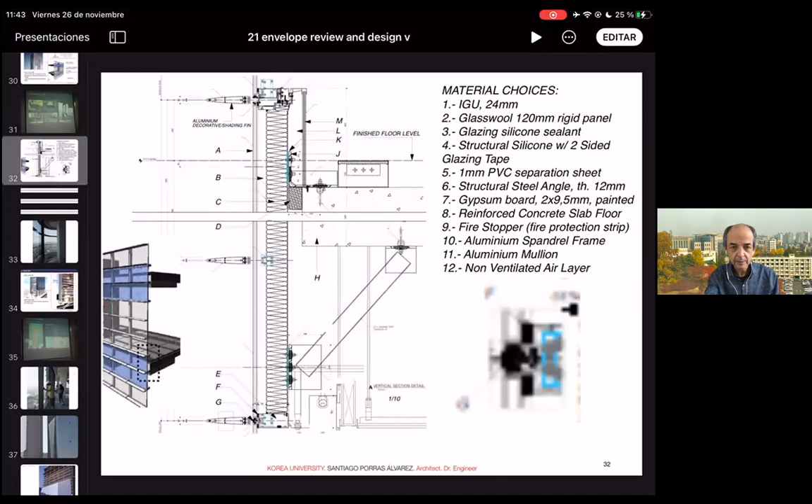So I just included the detail, but we will not have time to see it today either. So let's pass over this. I will try to put the solution in Blackboard so you can see it. This is what he commented, and there was a difficulty. So this is the only glass element. The problem they had is that there was no way to put the upper floors because the cranes from the land didn't arrive. So they had to make a very strange setting to complete the 2 last floors of this element. And the other thing they realized, this is the slanted element, is that it collects dust.

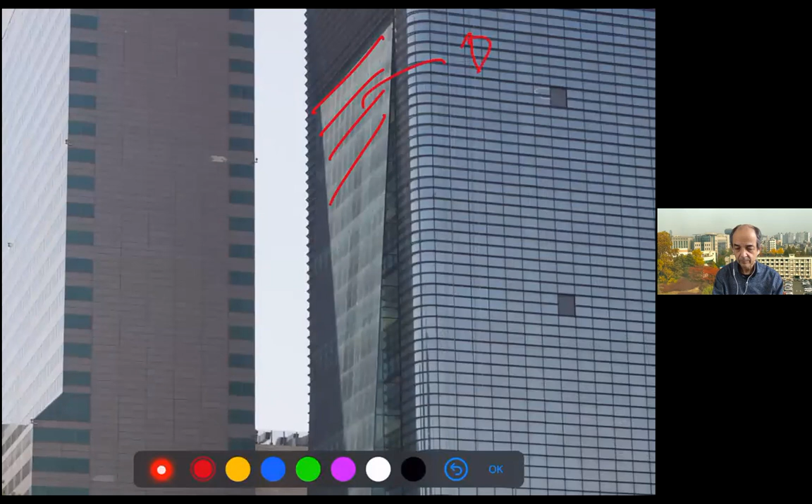And nobody was aware of it, they said, when it was done. I passed recently, and I think they have a hard time cleaning it. I leave one more example. I wanted to do it in class, but this is a US standard. It is a different style of drawing. So I wanted you to have a bit more practice on this and see more curtain walls, and one heavy curtain wall, which we didn't see. You will see it later.

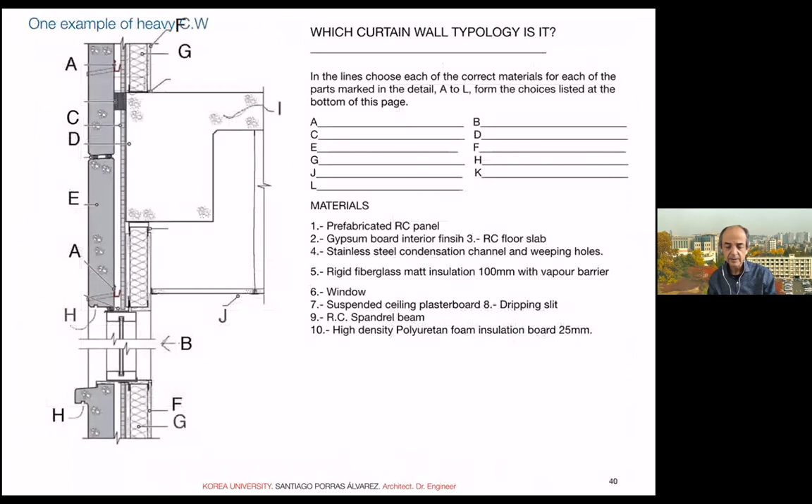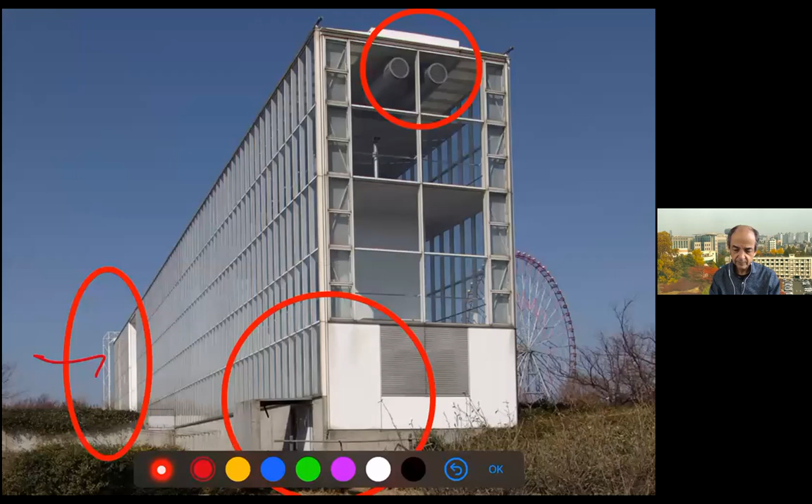And then one nice building with some details: planes, the cleaning element, the condition of the ground, and the ventilation insertion. And those elements which allow some kind of expansion. This building is very long, so you need to have every few elements some elements which allow the aluminum to expand and contract, and of course some rigidizers because it will be floppy. And then the connection with the ground, you will see that condensation is a real problem. In this case, it affected the carpet only. Definition of cracks. I put this because this is a nice building.

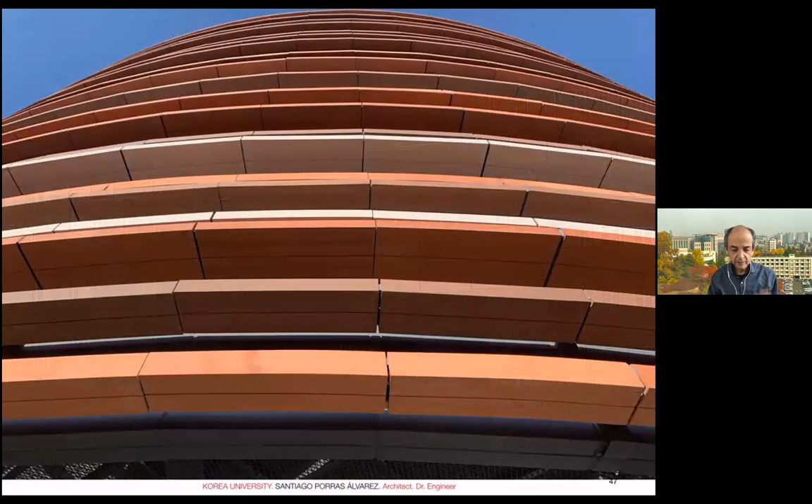My God, it's the time. Okay, I will comment tomorrow. Actually, it was just a few details of the plinth. The assignment is nothing new, just a reminder.